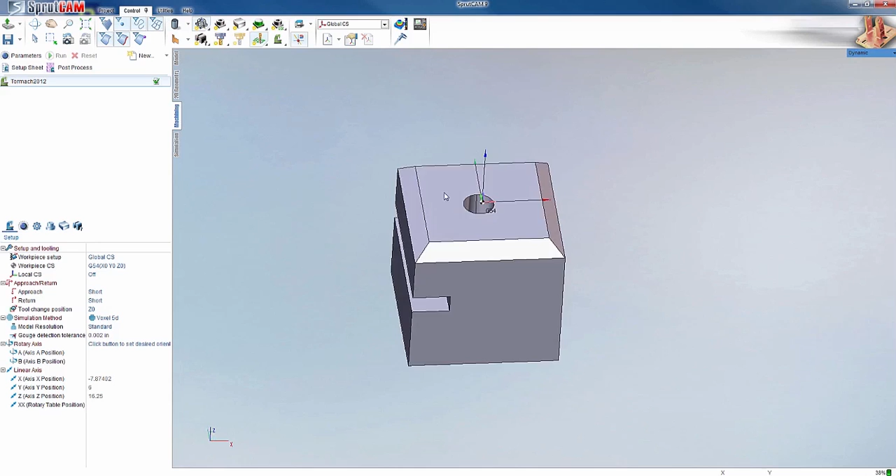First thing you're going to want to do is create a 2D contouring operation. Then you either want to double click it, or highlight it and hit parameters.

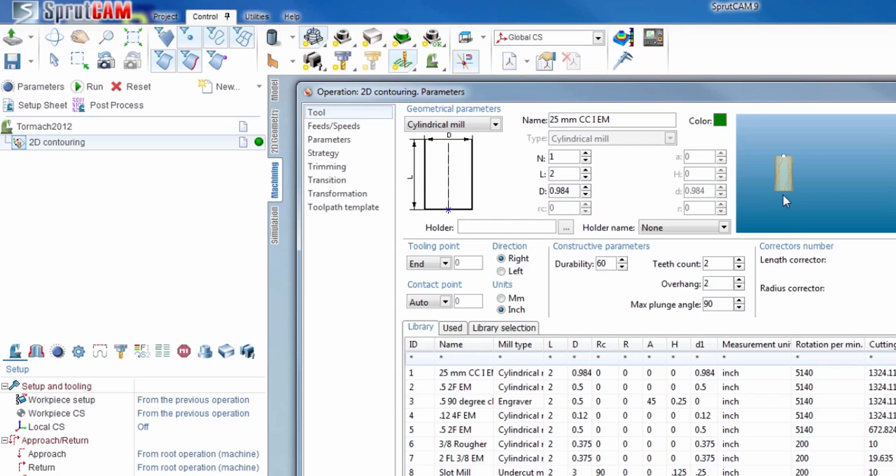We want to make our tool. I find using an engraver is the best way to do this. Creating tools with an engraver is nice, especially with the angle on the end, because if you use a certain tool like a drill mill, you can use that to spot or for chamfering. If you make it as an engraver, you can use that tool in both hole machining operations and 2D contouring operations. So hit cylindrical mill, engraver.

We're going to do a half inch engraver, and it's going to be a 90-degree included angle because the chamfer is at 45 degrees. So, chamfer - name that tool 1, diameter is half inch. The angle is 45, and diameter is 0. You don't need to worry about the big H, that will automatically update when you set the angle and the little d, which is the diameter of the tip.

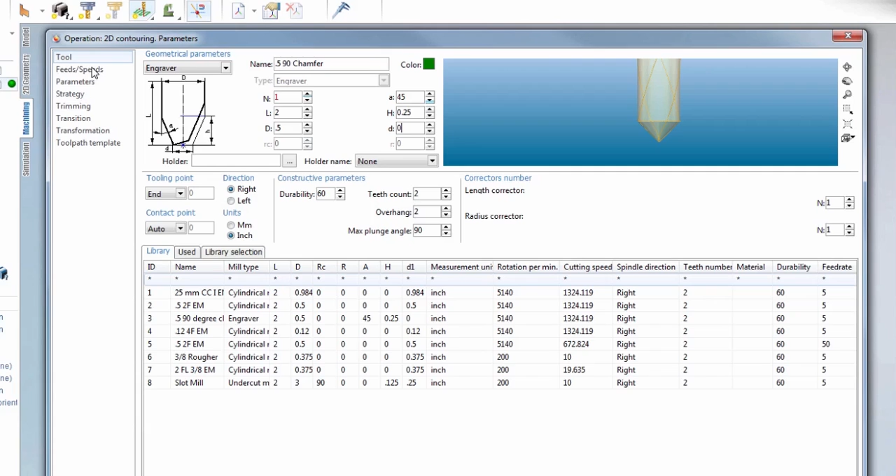Alright, so we're going to use that tool. Now we want to add a contact point. This is so that it follows the curve we're going to select, not on this point, but up on the side, and that leaves a cleaner cut.

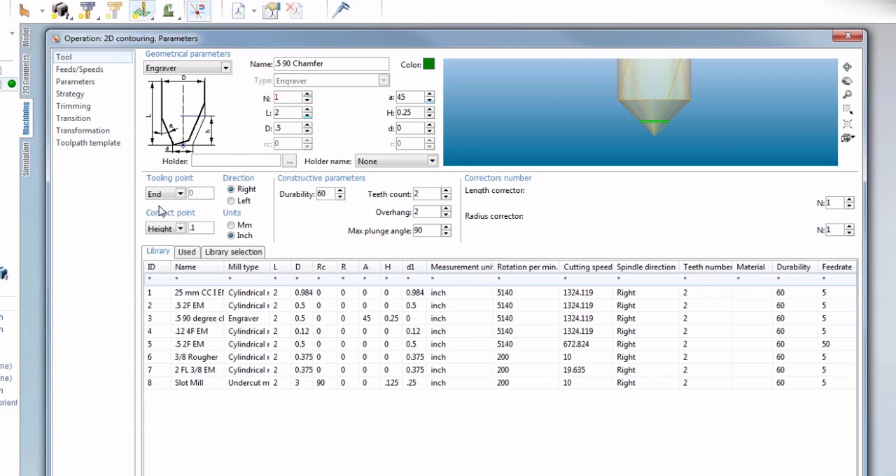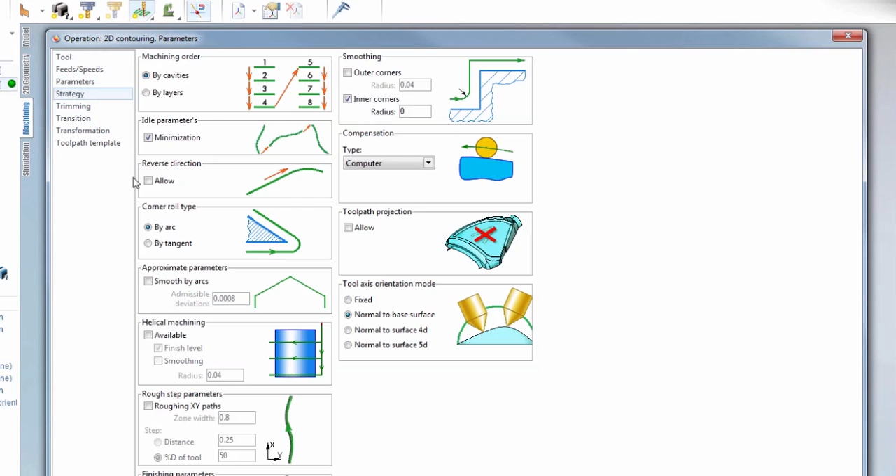So you're going to go to contact point, height, and we'll do 100 thou, 0.1. I'm not going to worry about feeds and speeds. Parameters, safe level 0.05, 50 thou. The top level and bottom level I'll set in the job assignment. We're going to set this to a quantity of 2. For strategy, I'm actually going to leave it how it is, but I am going to turn helical machining on so it slowly works its way down.

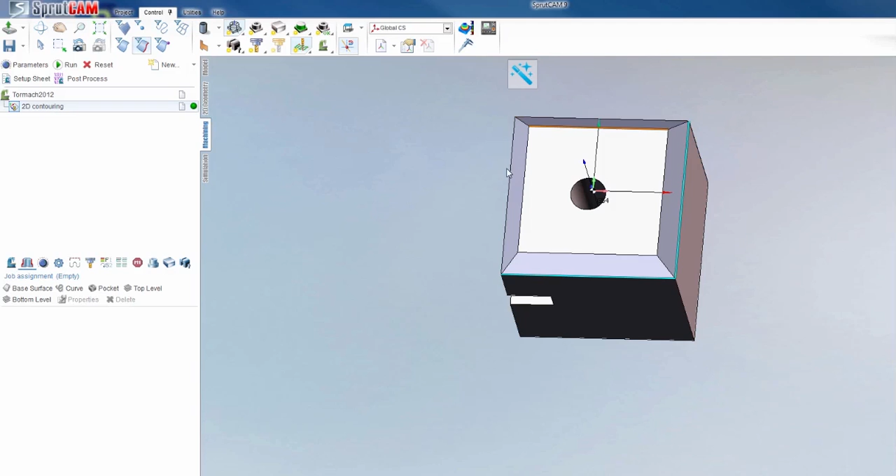Hit OK. We now want to go to job assignment over here, and we're going to select the bottom edge of this. I'm going to turn faces off so I just have edges on. Hold down Control... hit curve. You'll see the green line around it that shows it's going to follow those curves.

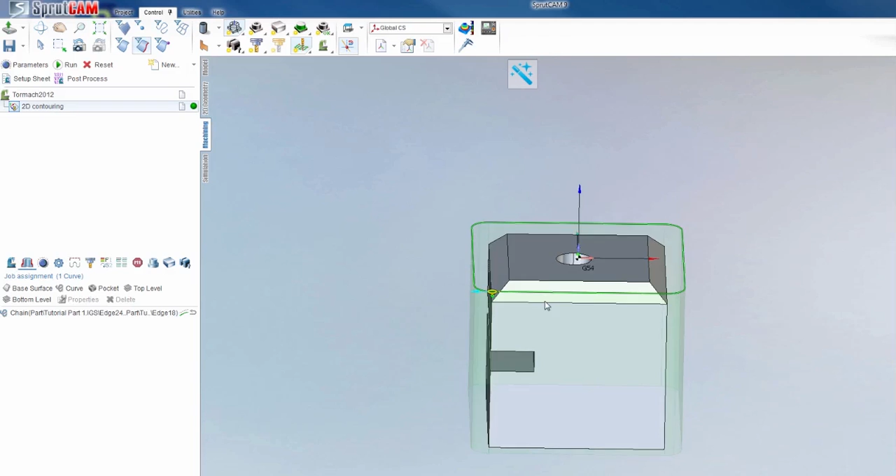We want to make a top level and a bottom level. So what I'm going to do is keep edges on and click that top edge and say top level, click the bottom edge and say bottom level. So now it knows to only go from there to there.

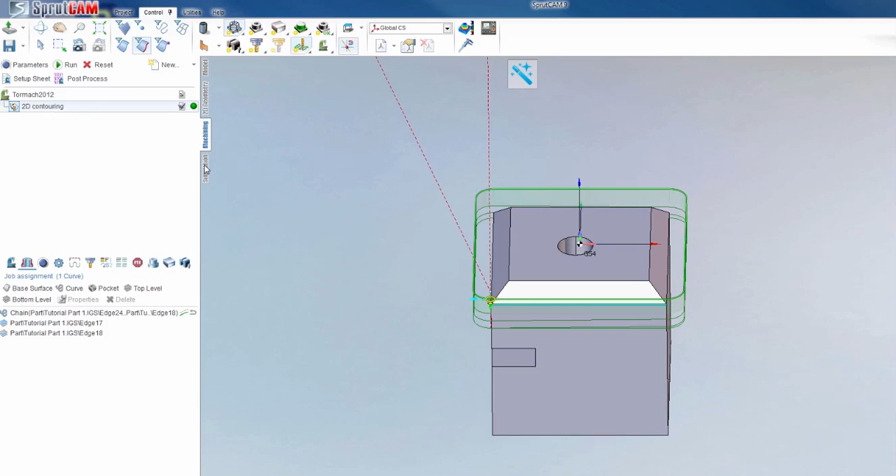Now I can hit run, go to simulation, and hit play. Now let's see what this does. It comes around... and hey, that actually didn't come out too bad.

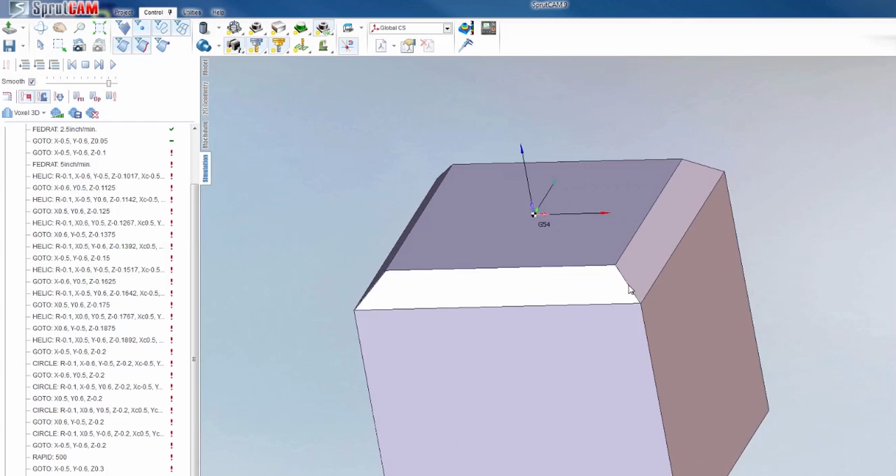Now you'll notice that this is going to round that a little bit, and I'm guessing that's why this is erroring out. Or it's because it's in the table. Let's raise this up here quick. I've shown this in another video, but you can highlight the Tormach 2012, hit the setup, hit global coordinate system, and move this up out of there. Hit OK.

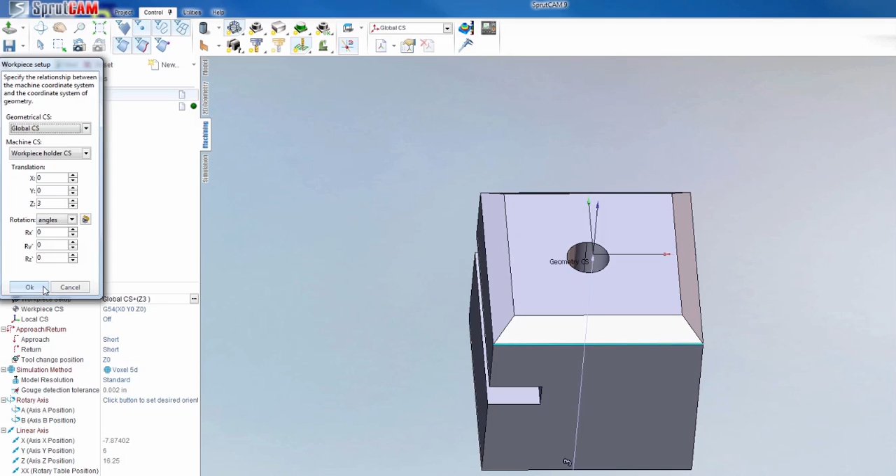Reset, run, and let's fast simulate this. Alright, so that actually came out pretty good.

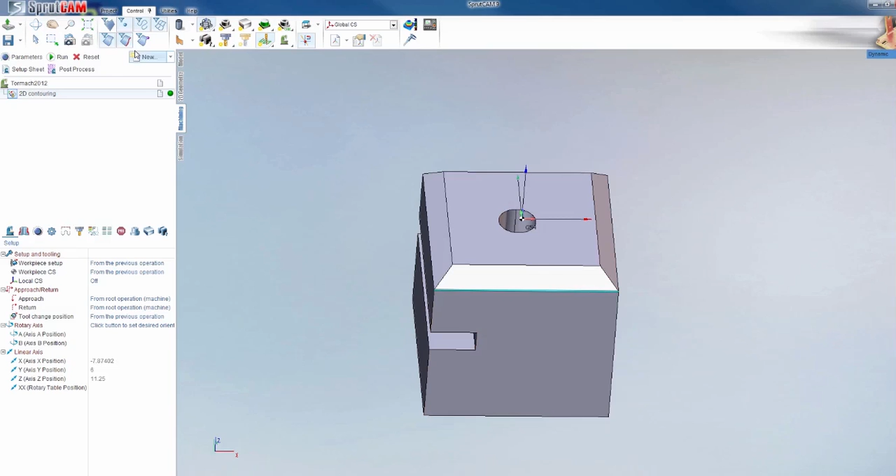If you don't want it to round these edges, you'll come back into strategy and hit by tangent, and you'll notice that squares it up for you.

So we'll reset it and see if we get any difference. Nope, none in this that I can see, so that turned out pretty good.